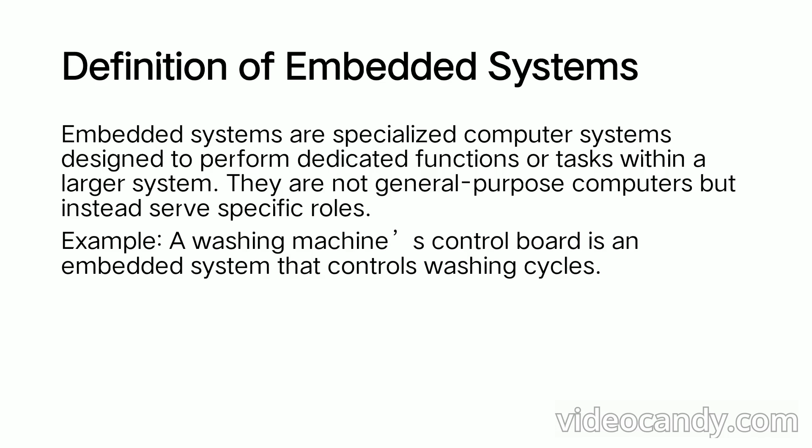A washing machine is a correct example of an embedded system, right? The machine controls a motor by using the software inside the machine, inside the control board, right? It is known as an embedded system.

Embedded system architecture. The block diagram of an embedded system majorly consists of microcontrollers and microprocessors, right? Microcontrollers and microprocessors are major equipment used in embedded systems for their efficiency and integrated features. Microprocessors are used for more complex systems requiring higher performance.

How the microcontrollers, memory, input-output ports and sensors work together. By using the CPU, it coordinates all the RAM, ROM, analog to digital converters, digital to analog converters, input-output ports and communication interfaces like UART, SPI and I2C.

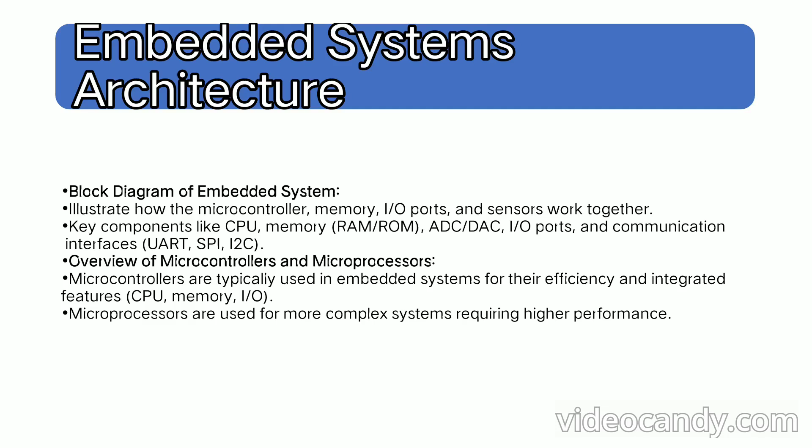The key characteristics of embedded systems. First, in real-time operations, embedded systems often need to process data and respond within a defined time limit. For example, an airbag deployment system must react within milliseconds in the event of a collision. Right? An airbag deployment system in the car is a correct example of a real-time application.

At the fraction of a second, when an accident or collision occurs, the airbag must be released, right? It is a correct example of an embedded system. Limited resources. Embedded systems often work within strict constraints like limited memory, processing power, and energy consumption. This requires optimized software and hardware design.

Dedicated functionality. Embedded systems typically perform one specific task repeatedly. For example, a temperature sensor in a thermostat only measures and controls the temperature, right? It is a specific task. It may be repeatedly doing the same process only.

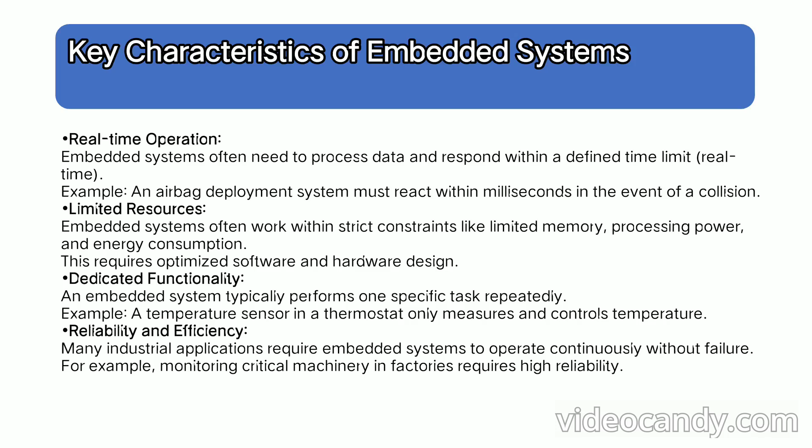Reliability and efficiency. Many industrial applications require embedded systems to operate continuously without failures. For example, monitoring critical machinery in factories requires high reliability. Industry applications of embedded systems. Overview of key industries: manufacturing and automation, controlling the machinery, managing factories and operations.

Automotive industry: embedded systems in vehicles for safety, diagnostics and efficiency. In healthcare, embedded systems in medical devices like MRI machines and patient monitoring. In energy management systems: smart grids, renewable energy, monitoring and distribution. Embedded systems in modern industry make industries more efficient by automating processes, monitoring systems and improving safety.

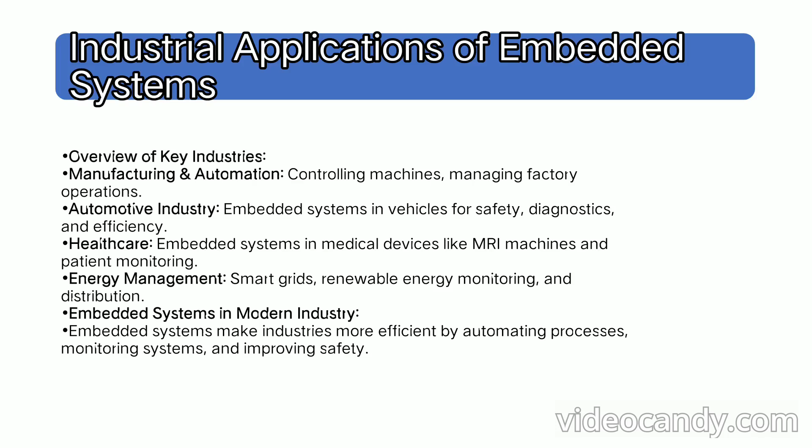Applications in manufacturing automation, right? One by one we are going to see now. In applications in manufacturing automation, role in controlling the machinery. Embedded systems are used in programmable logic controllers, PLC, to control the machinery in factories, assembly lines, and other industrial settings.

Real-time data collection and processing. Data from sensors like temperature, pressure, or motion detectors is continuously monitored in real time for optimal control and adjustment. For example, PLC and SCADA, supervisory control systems, are used in embedded systems to monitor and control processes at industrial sites.

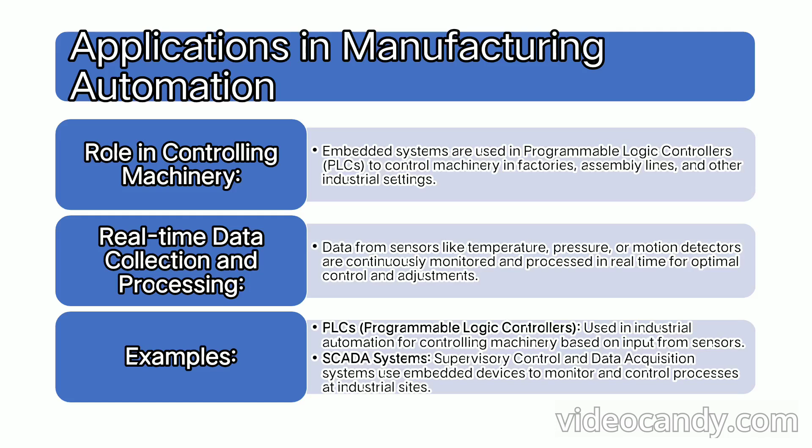Embedded systems in robotics. Robots in industrial settings are used as arms, industrial arms. Industrial robotic arms are used for specific tasks like welding, assembly, and painting. The role of embedded systems in navigation and control. Embedded systems use algorithms to process inputs from sensors like cameras, ultrasonic sensors, and GPS to navigate the environment.

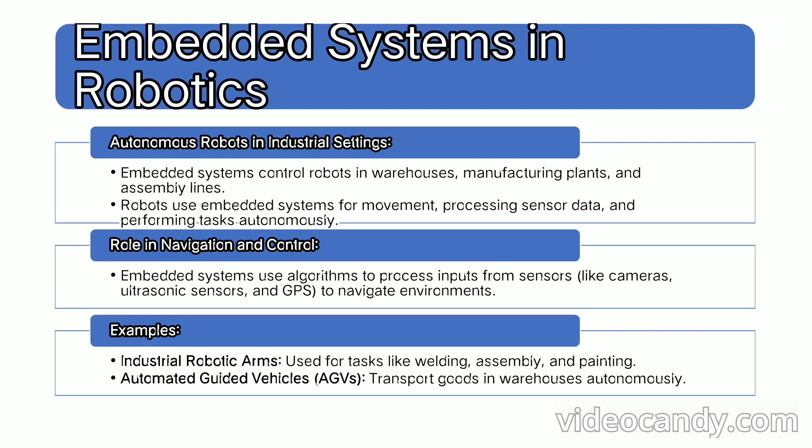Embedded systems control robots in warehouses, manufacturing plants, and assembly lines. Robots use embedded systems for movement, processing sensor data, and performing tasks autonomously. Embedded systems in process control.

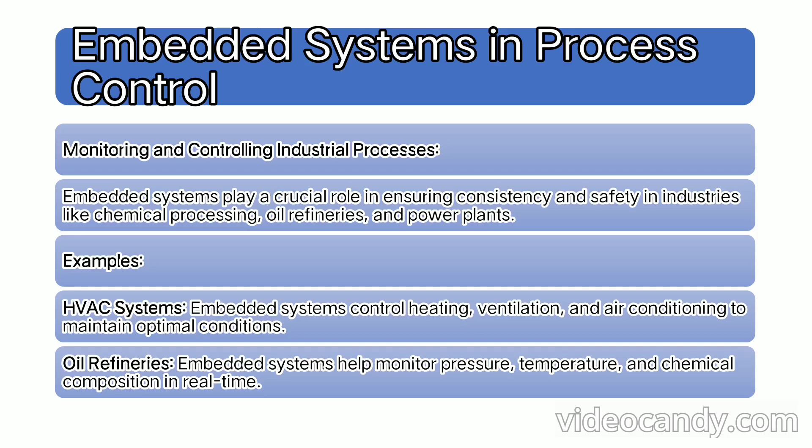Monitoring and controlling the industrial process, embedded systems play a crucial role in ensuring consistency and safety in industries like chemical processing, oil refining, and power plants. In HVAC systems, embedded systems control heating, ventilation, and air conditioning to maintain optimal conditions. In oil refineries, embedded systems help to monitor the pressure, temperature, and chemical composition in real time.

Embedded systems in the automotive industry power the Advanced Driver Assistance System, called ADAS. Embedded systems power features like lane departure warning, adaptive cruise control, automatic emergency braking, and self-parking.

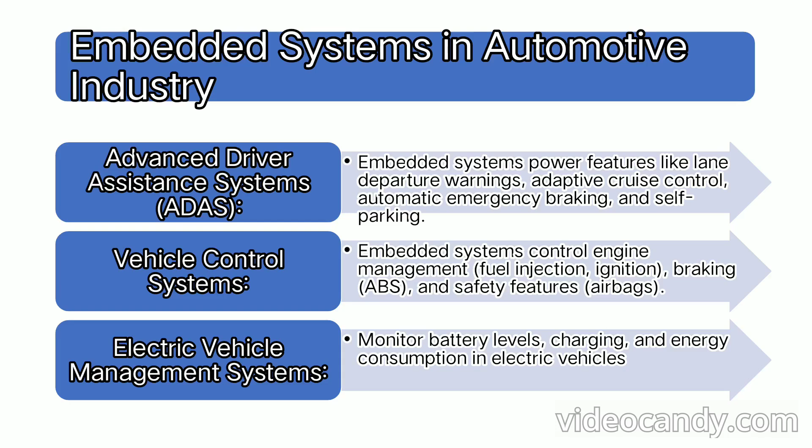Vehicle control systems: embedded systems control engine management like fuel and ignition systems, braking like ABS, and safety features like airbags. In electric vehicle management systems, they handle motor monitoring, battery monitoring, level of battery charging and discharging, and energy consumption in electric vehicles.

Embedded systems in healthcare and medical devices are central to the functions of medical devices like pacemakers, insulin pumps, and blood pressure monitors.

In patient monitoring and diagnostics, embedded systems are used in devices that monitor vital signs such as ECGs, pulse oximeters, heart rates and monitors.

For example, MRI systems and infusion pumps. MRI systems are used for image processing control, and infusion pumps are used to deliver medications and nutrition to patients in a controlled manner and on time.

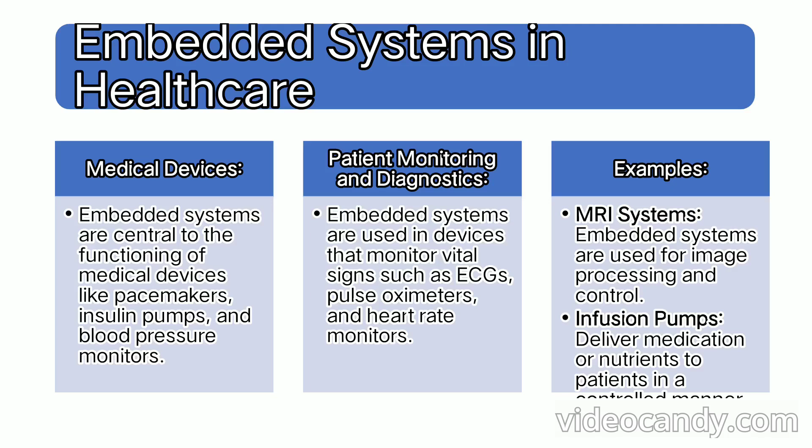Energy management and smart grids: roles in energy consumption monitoring. Embedded systems play a vital role in smart meters, tracking energy usage in real time and communicating with utility companies for billing and monitoring. In smart grids, real-time data collection and automated responses help improve the efficiency of power distribution systems.

For example, renewable energy systems manage the integration of solar and wind energy into the grid. Smart meters allow remote monitoring and management of energy usage.

Communication systems for industrial IoT. Embedded systems enable devices to communicate with each other and the cloud, forming the backbone of Industry 4.0, called the Internet of Things, IoT.

Enabling communications, protocols like Modbus, CAN, and MQTT are used to ensure reliability in data transfer and remote control of embedded systems. For example, wireless sensor networks.

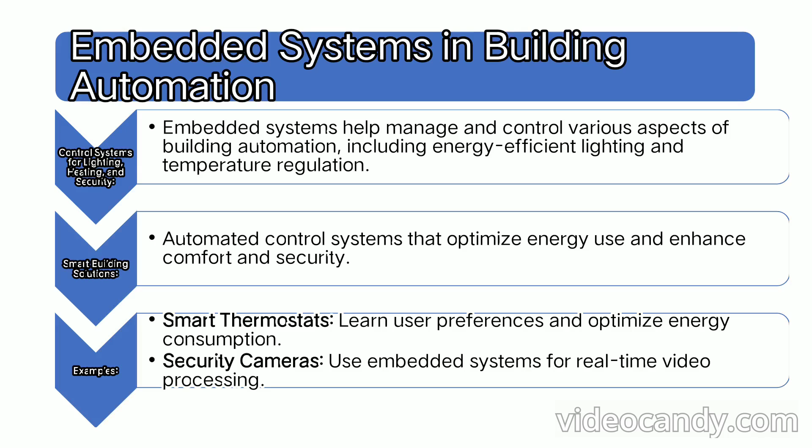Embedded systems in building automation control systems for lighting, heating, and security. Smart building solutions and automated control systems optimize energy use and enhance comfort and security, like smart thermostats and security cameras.

Challenges in embedded systems for industry: power consumption. Many embedded systems need to operate in low power environments, especially for battery-operated systems.

Real-time processing demands: industrial embedded systems often need to make decisions and take actions within strict time constraint limits. Hardware limitations such as memory, processor, and input-output capacity can limit the performance of embedded systems.

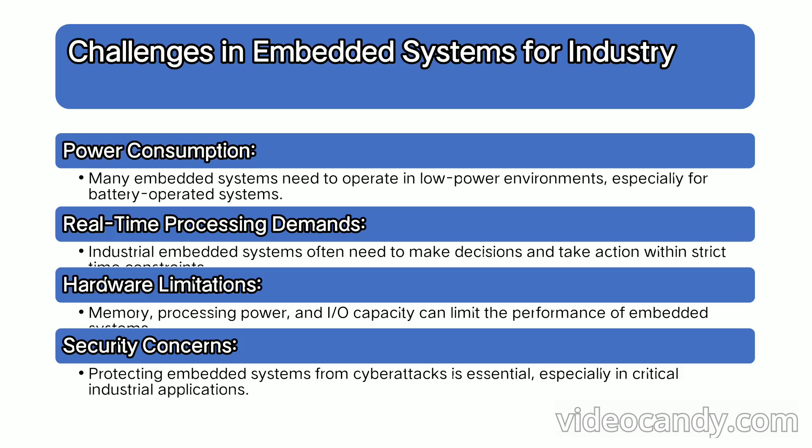Security concerns: cyber attacks. Protecting embedded systems from cyber attacks is essential in critical industry applications.

Design and development process: first, we have to gather the functional and non-functional requirements, and then select. For hardware design, we select the microcontroller, sensors, actuators, and other components.

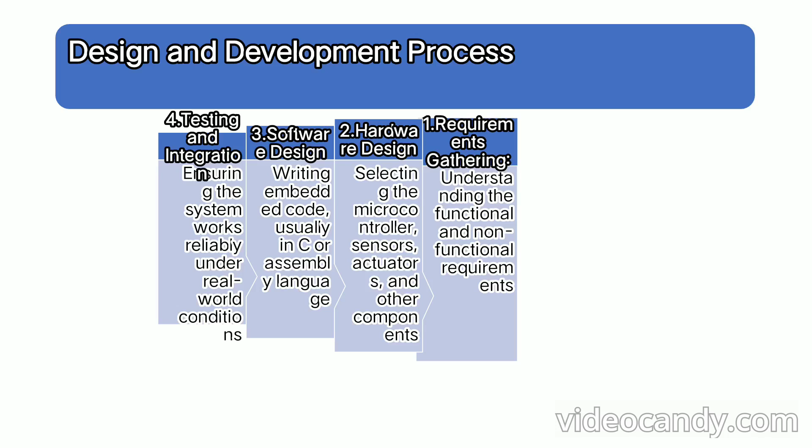For software design, we write the embedded code usually in C or assembly languages. At last, we test and integrate using real-world applications.

Embedded software for industrial applications: software tailored for embedded devices is often designed to interact directly with the hardware. Real-time operating systems are used to manage tasks in real time, ensuring timely response to external events.

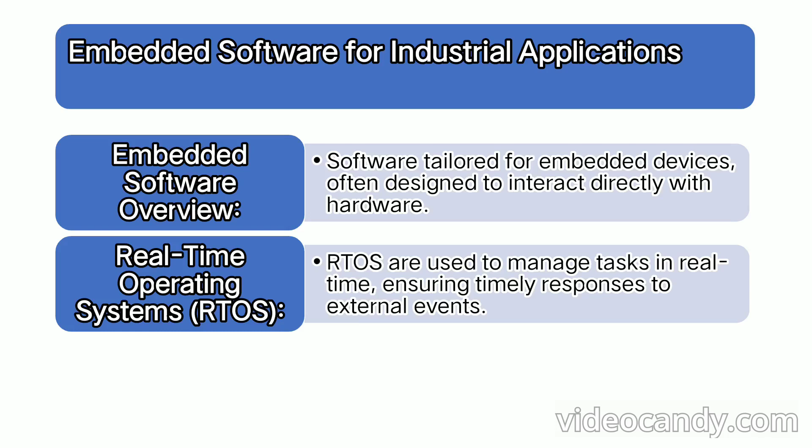Industrial standards and protocols: there are some protocols and standards used in industries, which we'll go through one by one. Industrial standards ensure that embedded systems meet safety, performance, and interoperability requirements.

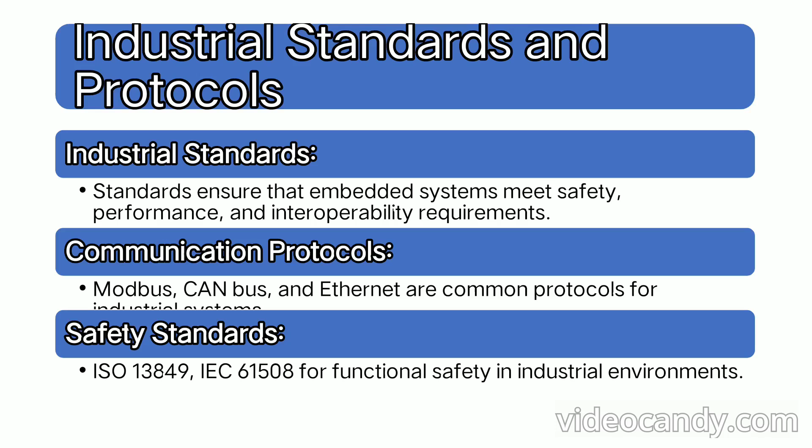In communication protocols, Modbus, CAN bus, and Ethernet are common protocols for industrial systems. In safety standards, ISO and IEC ensure functional safety in industrial environments.

Security in industrial embedded systems: threats. Industrial equipment is a target for cyber attacks. Before an attack, we take safety measures such as encryption, authentication, and intrusion detection, which are critical for securing embedded systems.

One by one, we can see the case studies. Case study number one: embedded systems in automated factories. This details how embedded systems control a factory's assembly lines or machinery for optimized production.

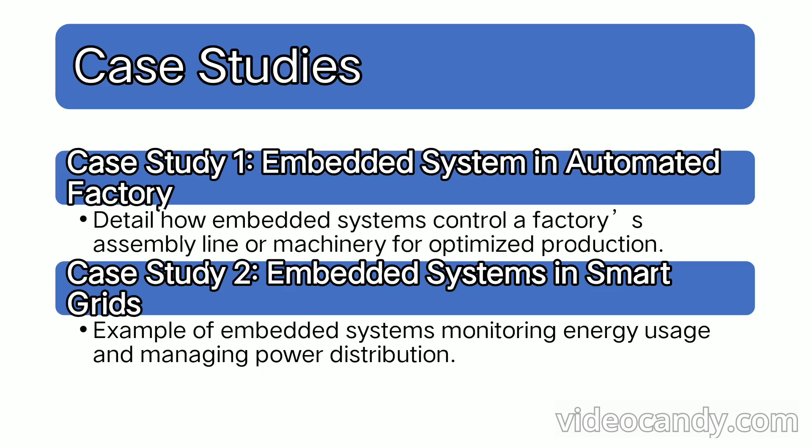Case study number two: embedded systems in smart grids. For example, embedded systems monitoring energy usage and managing power distribution.

Future trends in embedded systems: we are moving toward AI. AI is a tool which is not meant to replace humans, but to enhance them. AI and machine learning integration allows embedded systems to make autonomous decisions based on real-time data.

Edge computing processes data at the edge to reduce latency and improve efficiency.

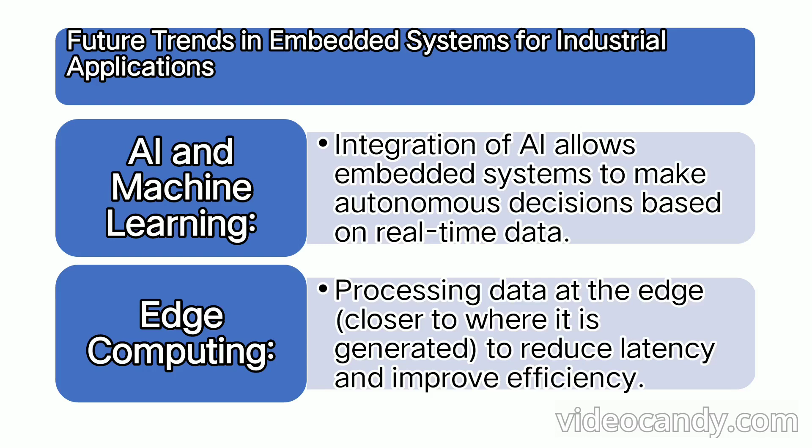To conclude, this overview of embedded systems shows they are essential for automation, control, and optimization of industrial processes. They are integral to industries like manufacturing, automotive, energy, and healthcare. Thank you.